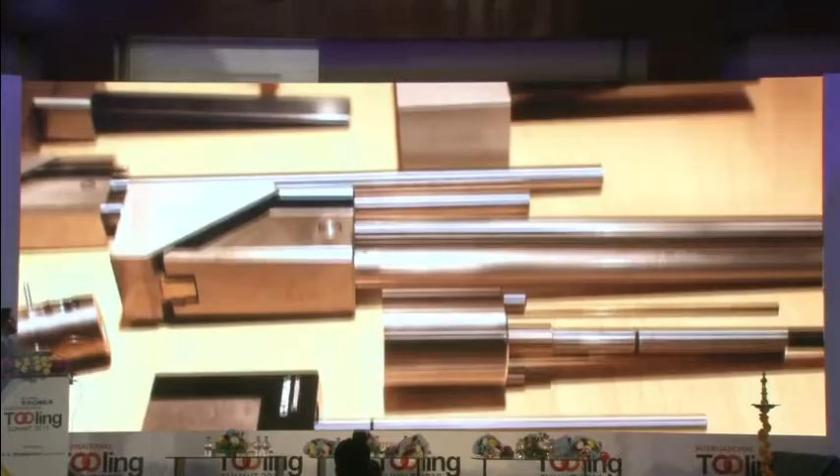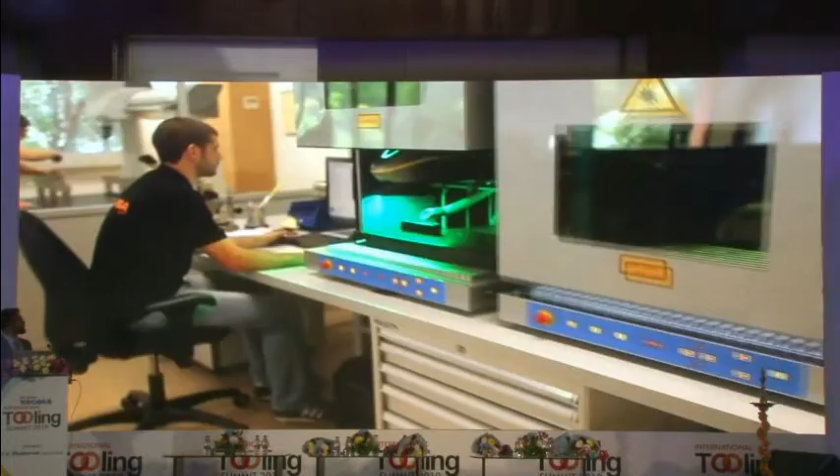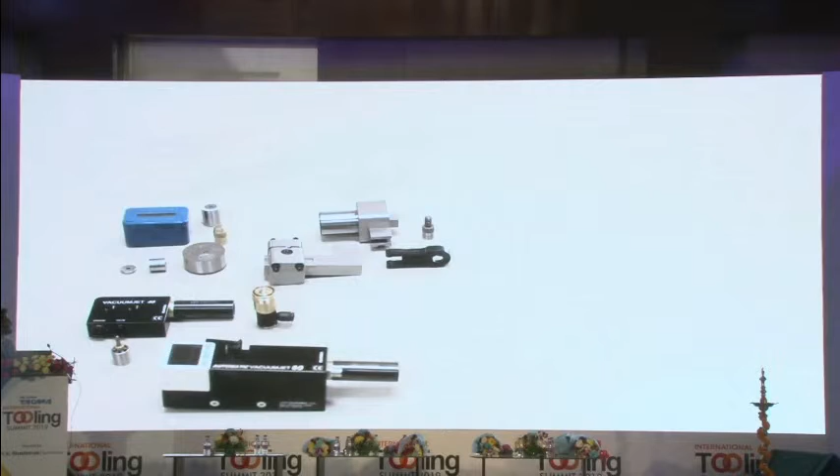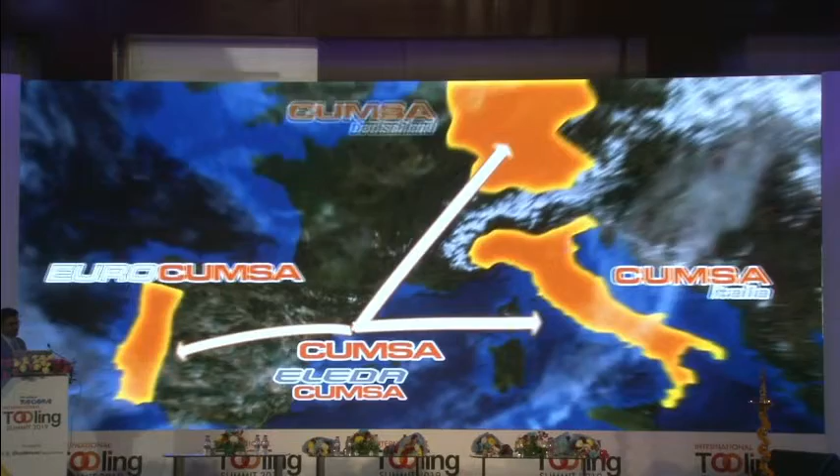CUMSA, founded in 1974, as a small family company dedicated to the design and production of molds. Throughout the early years and our growing experience, we could see that the customer's high-quality requirements could not be met due to technical difficulties typical within this sector. So we began creating our own solutions to these problems, developing parts that drastically improve the performance of our molds. Upon realizing just how much of a revolution our parts were, we discovered our future: innovation. At CUMSA, research and development is the motor of the company, and innovation, our DNA. We design and produce completely interchangeable standard parts for mold makers and molders, which allow reduced mold manufacturing time between 30 to 40%. Simple installation and adjustment within the mold. Fast replacements from the parting line. Minimized production downtimes. Reduced mold sizes. And cheaper production costs. Years of hard work, determination, and precision have made us a leader of standard parts within the molding industry. Our constant growth wouldn't be possible without the direct contact and feedback from our end customers, a goal we achieve through DTM CUMSA, who continue our original idea of the production of molds. Our best guarantee: 40 years of experience, and our branches in Portugal, Italy, Germany, China, and the USA. We were born reinventing, and we continue innovating. CUMSA, we are innovation.

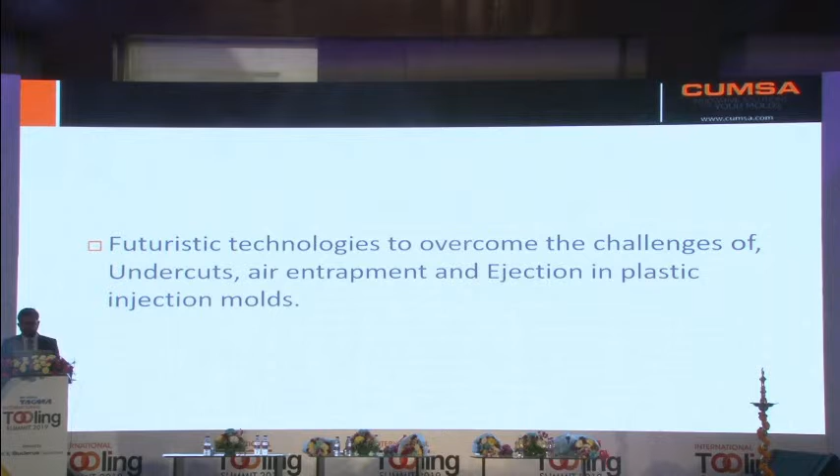Thank you. As rightly said in the video, innovation is in our DNA. So we straight away jump into our topic: futuristic technologies to overcome the challenges of undercuts, air entrapments, and ejections in plastic injection molds. I will start with an example of a simple small size undercut. The conventional way to release the same is by using an angular device, whereas in CUMSA we use a sprung core, which is very compact in design.

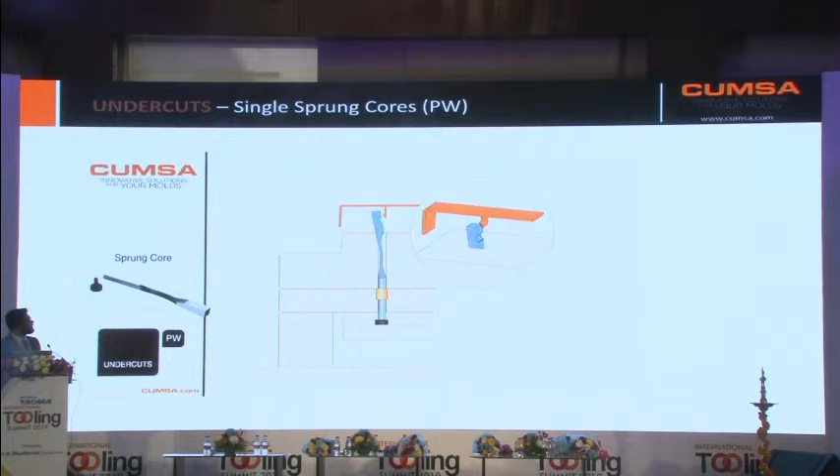Here's a small animation showing the sprung core working. All the machining is 90 degrees from the parting line. That's the biggest advantage. Here's an image showing an undercut on the two sides, which is released by two face-to-face sprung cores. And as we all know, since the 1990s, sprung cores are widely used.

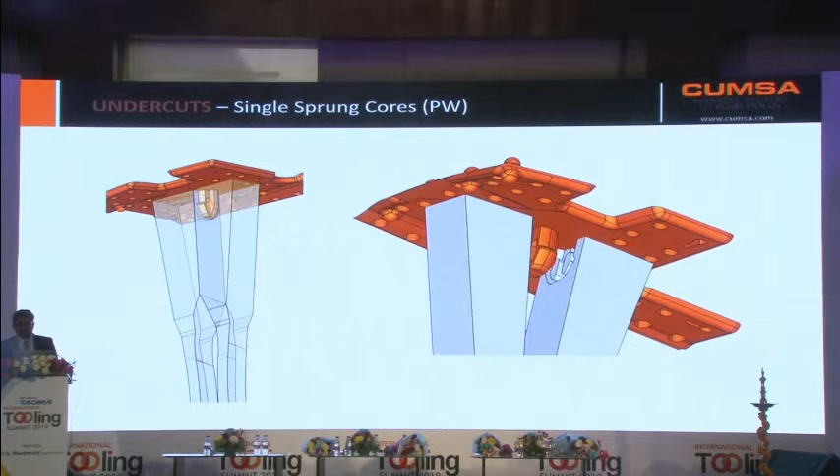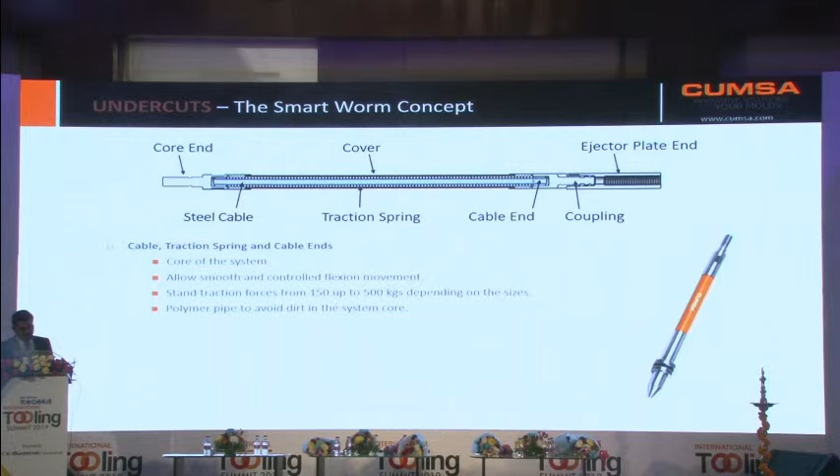So as a part of innovation, we have in place of the sprung core the new smart worm pin concept, which is structured using a traction spring and steel cable, thereby improving flexibility, strength, and longevity. Here's an animation showing the working of a smart worm pin lifter. The ejection strokes start from 60 mm to 120 mm, demolding undercuts up to 13 mm.

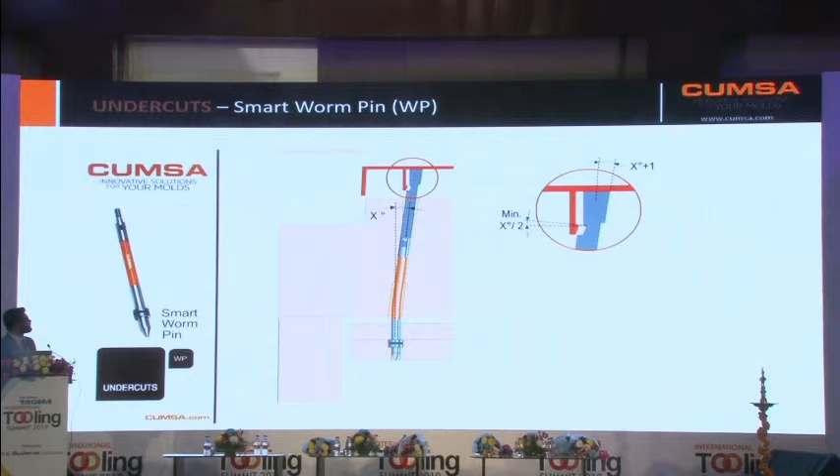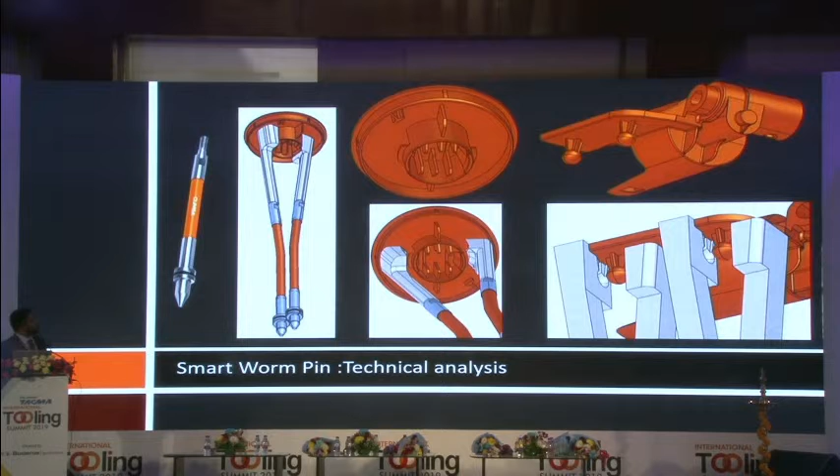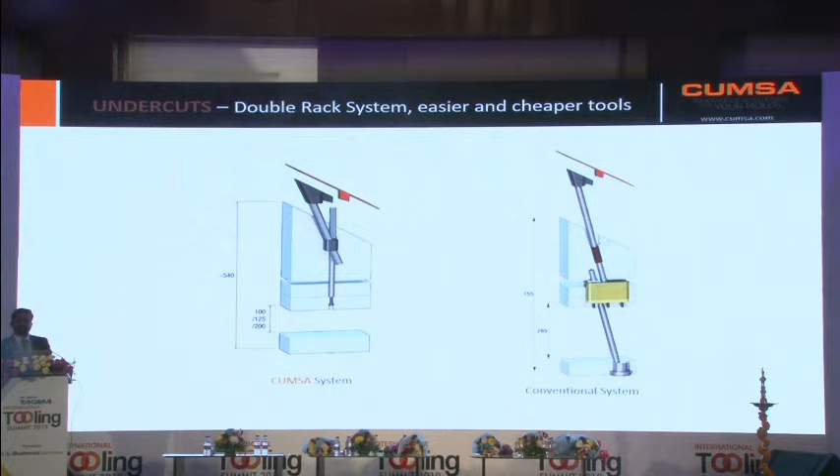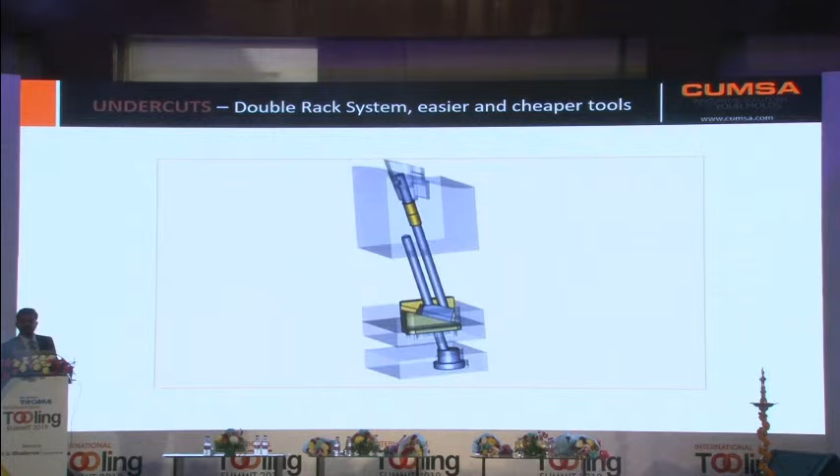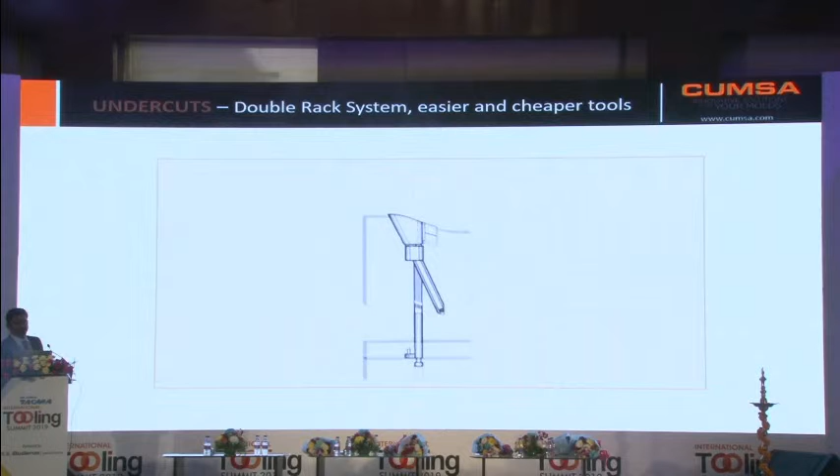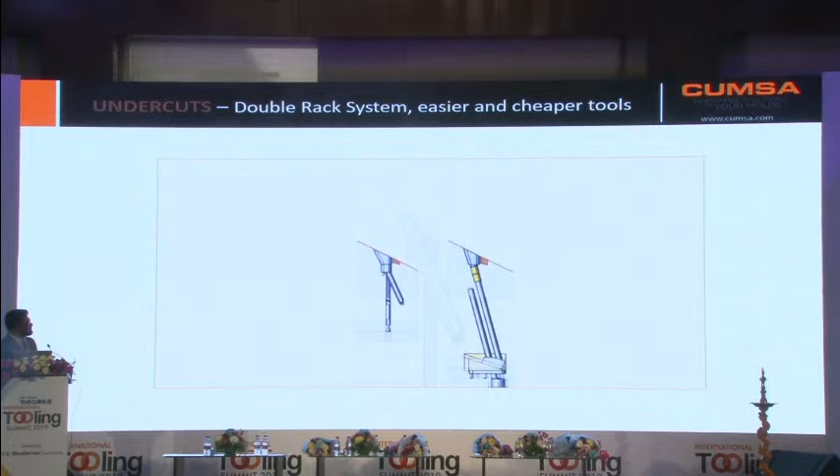Here I would like to take you through an animation showing the difference between the traditional solutions and the new double rack system. This is the typical one, and that's the innovation from CUMSA, the new double rack. This system eliminates the need for highly precise angular machining. That's where we can see the difference. The conventional system has much longer ejection strokes because of its angular function.

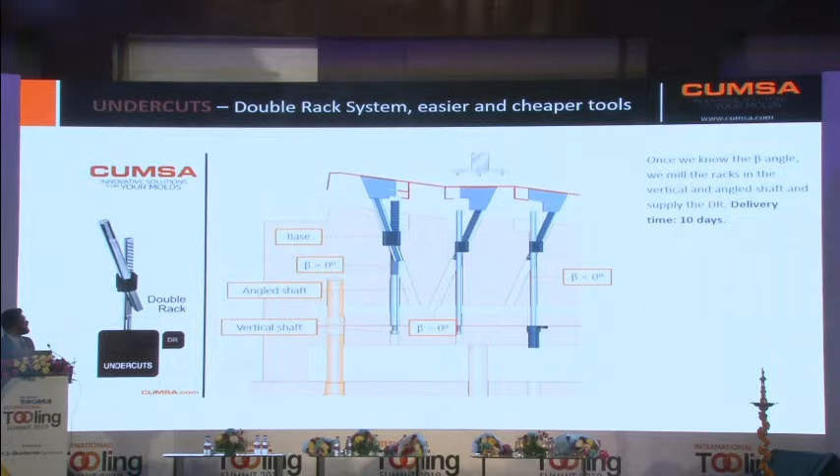And with the CUMSA double rack, we can demold undercuts with a draft of -55 degrees to +35 degrees with a maximum ejection stroke of 125 mm. Now that's a big saving. Here's an image showing the construction of a double rack lifter assembled into a tool with a plastic component having 3 different draft angles, one negative, one positive, and another flat. So all 3 different undercuts are released with the same ejection stroke.

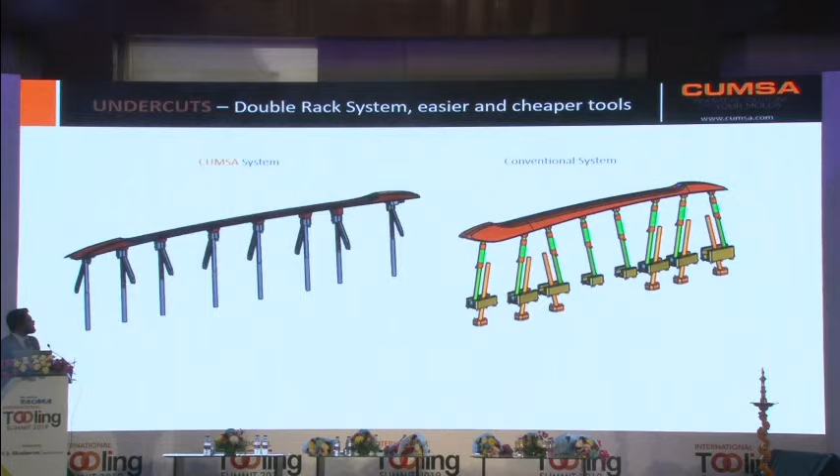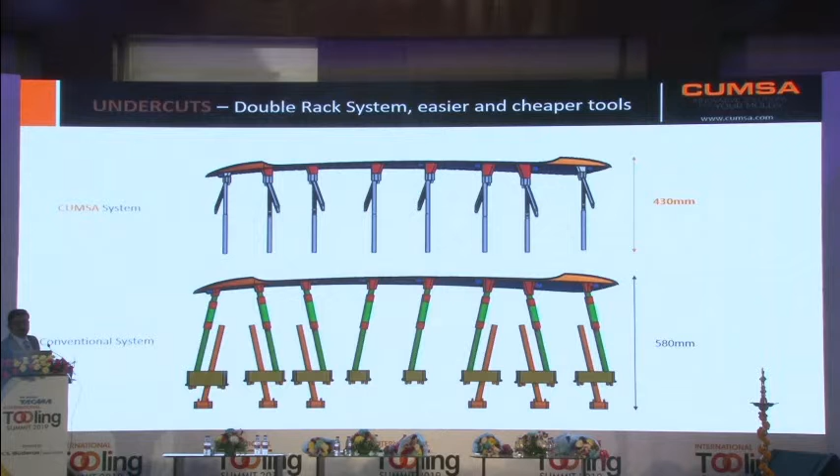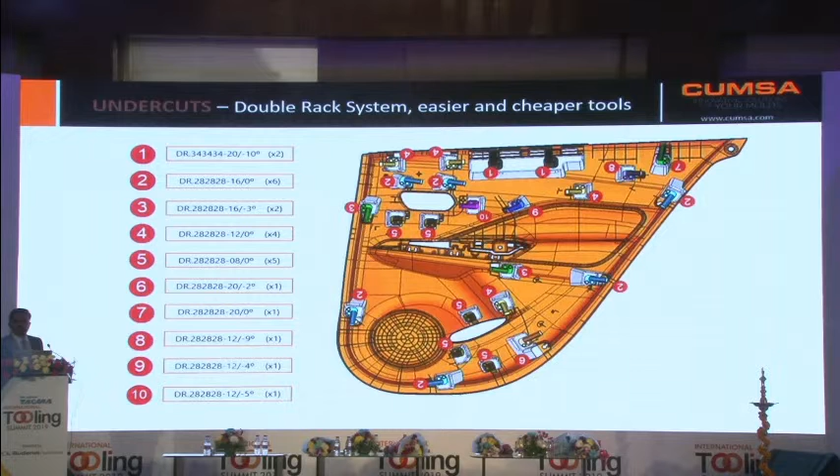That's a profitability study between a conventional system and a CUMSA system with the same part. This is where we see the advantage, that the mold height is reduced by almost 150 mm using the CUMSA system. That's the image of the part having the dog housings. This is one of the most complicated case studies, a door trim having different dog housing undercuts from 0 degrees to -10 degrees.

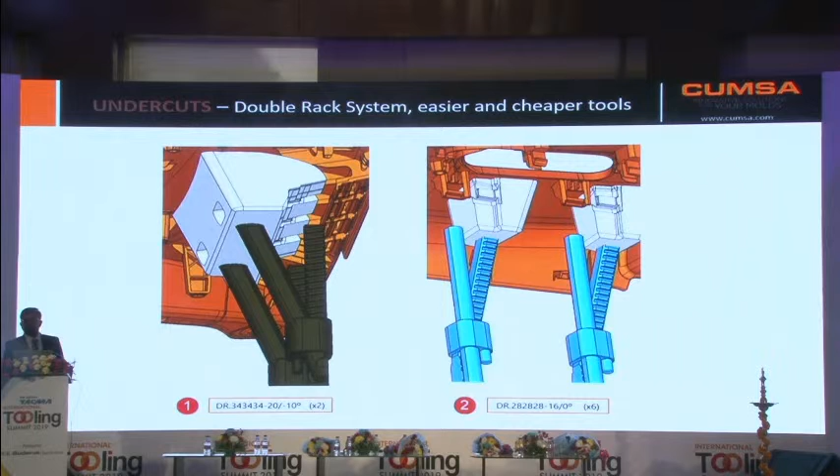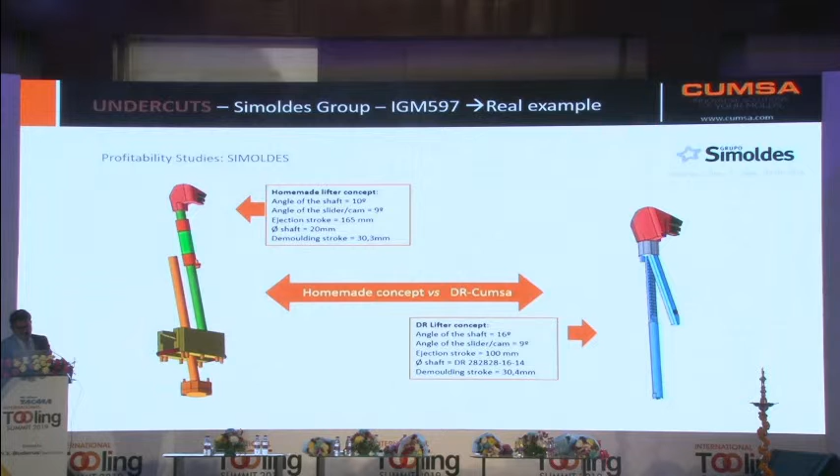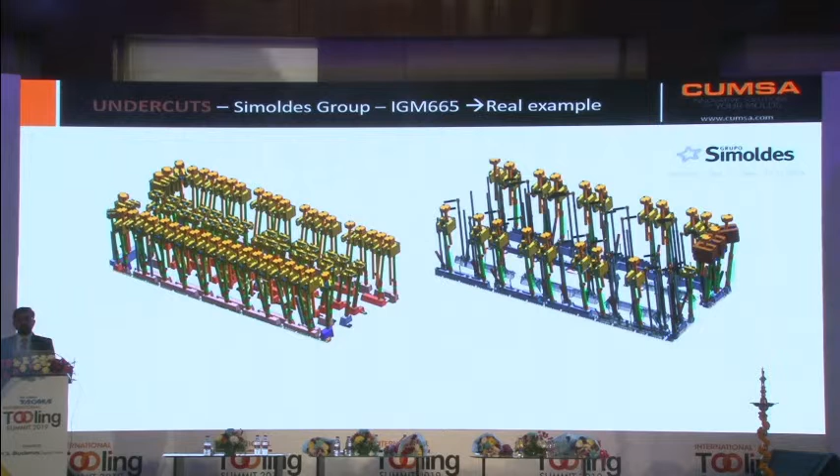Here's a very interesting profitability study made by Simoldes between a conventional lifter and the new double rack system. We can see the typical construction of the angular lifters on the left, and on the right we see the CUMSA systems installed to the part. On the right, we are getting bigger space to accommodate the ejector pins at the right places and also to achieve symmetry of the cooling.

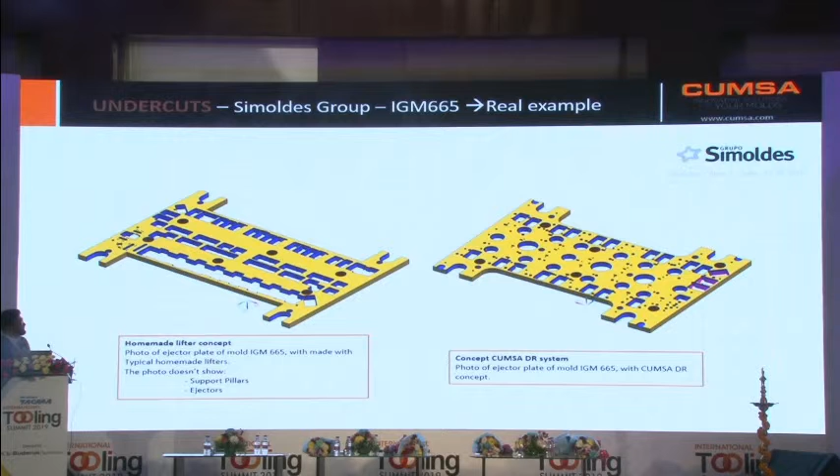This is the difference of machining between the CUMSA system on the right, and on the left we have the conventional system. This is the ejector plate. So overall, using the CUMSA system over the conventional lifter, Simoldes saved around 6,000 euros.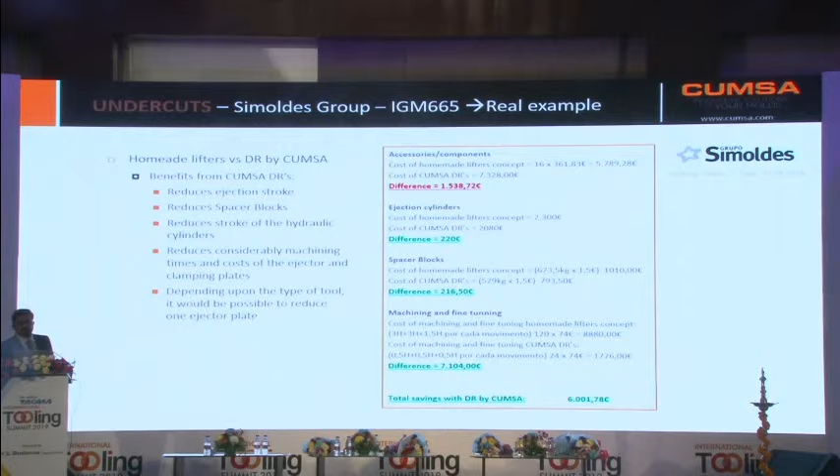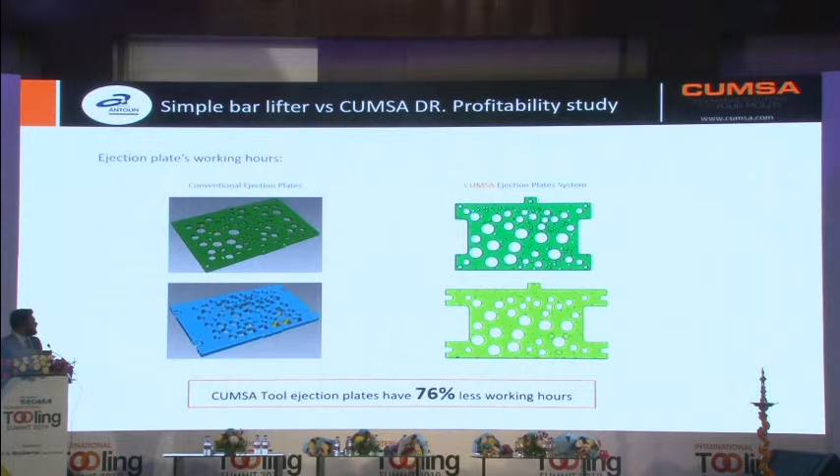Here we have another case study between Grupo Antolin. Grupo Antolin saved 76% of working hours with the CUMSA system and had 44% less ejection stroke. Now that I would say is a big saving because you're reducing the tool height, and that in turn reduces the cost of the steel.

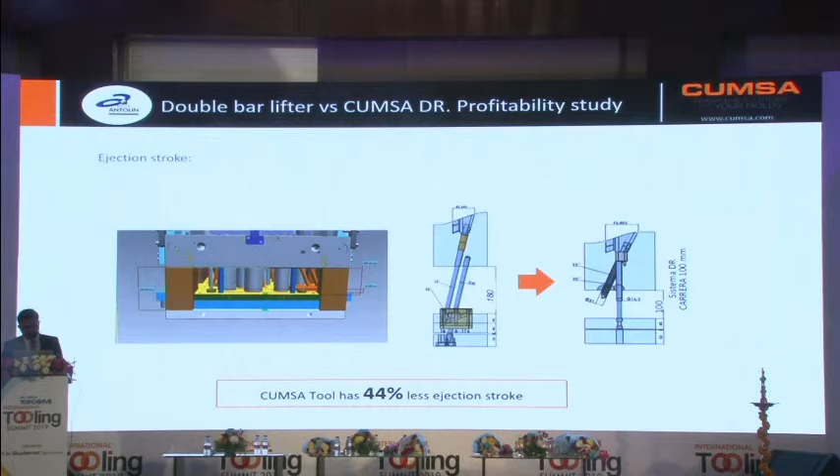The image on the left shows how complicated it was to release the undercut using the sliders, whereas the image on the right shows double rack systems installed vertically, enabling a reduction in tool size. Also, what we can observe is that the cooling is taken right to the insert, enabling cooling of the part where it is required to be cooled.

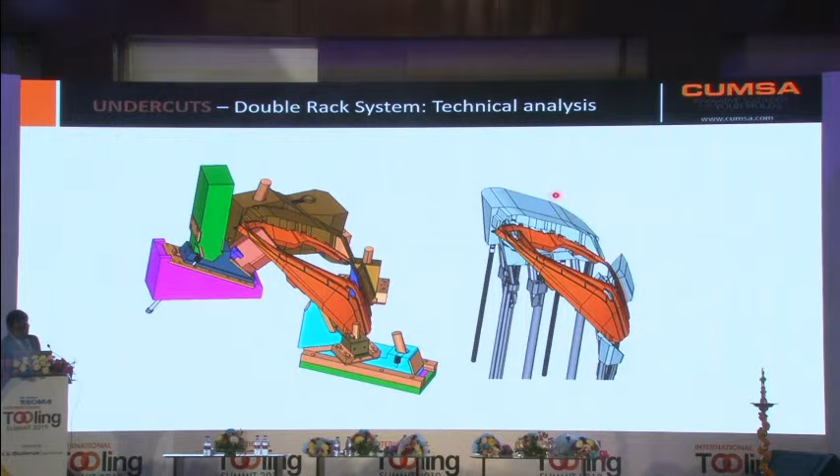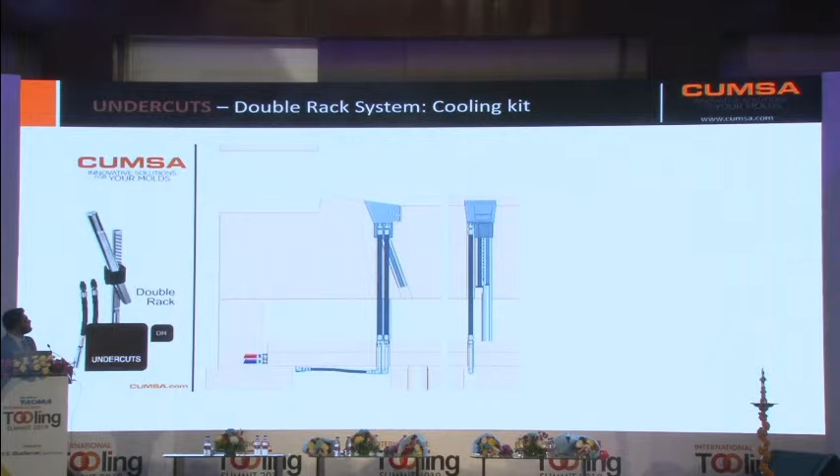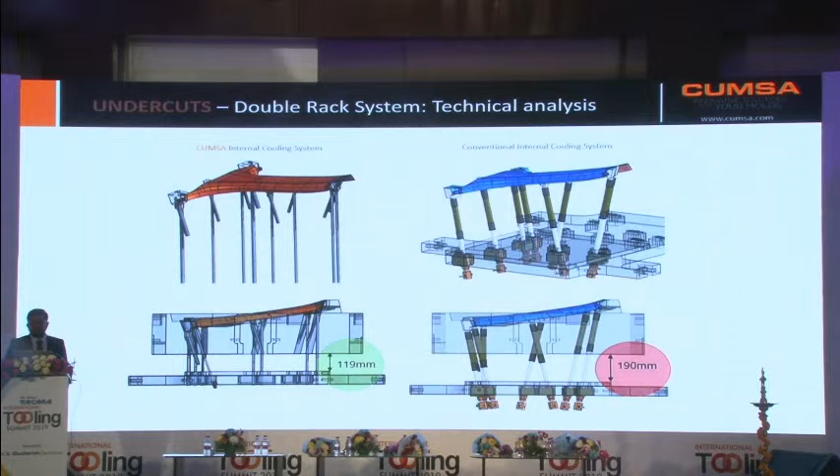Now that's an animation showing the double rack system with cooling system. That's another case where we have taken the cooling right to the insert. Here's a case study between a conventional cooling system and a CUMSA internal cooling system. With the CUMSA internal cooling system, the customer was able to achieve 70 mm less ejection stroke.

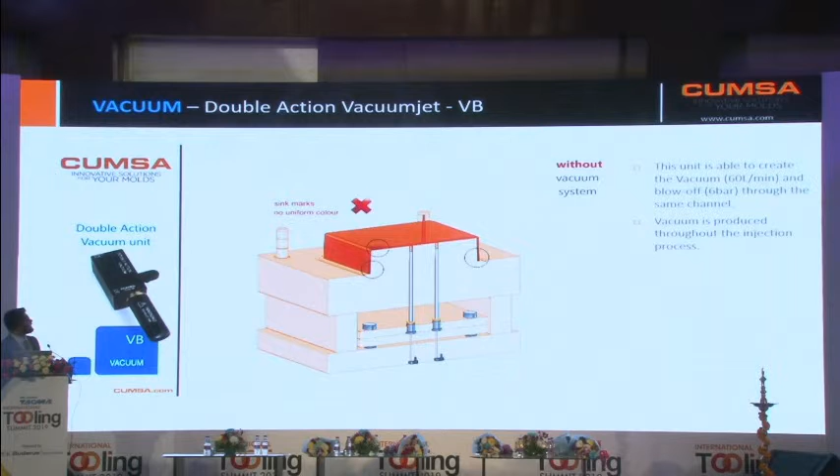Now, one of the biggest challenges that we all face is air entrapment in the mold. I would like to take you through a brief animation which speaks for itself. That's the air getting trapped in the mold. The air gets cornered at one end, at the last fill area, and we observe burn marks or non-uniform homogenization.

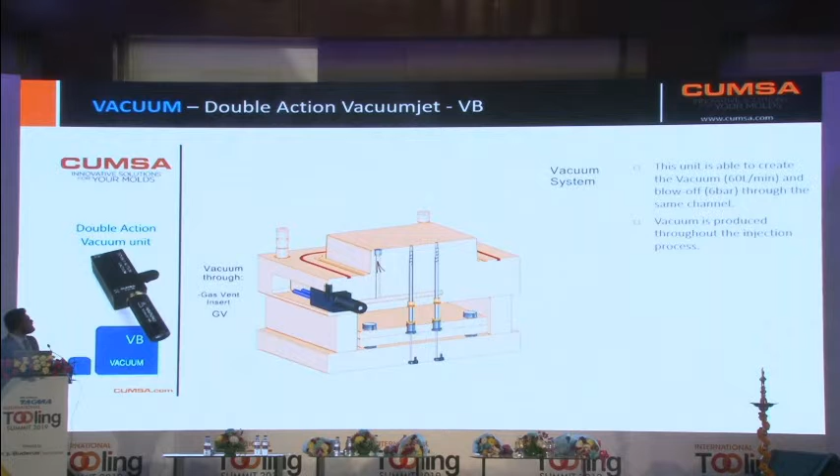Now, while installing a CUMSA system, we drill the vacuum channels using the gas vent inserts, which perform both functions: one is to exhale the air from the cavity, and second, to blow off the gas. That's the installation of the vacuum jet system. And the complete tool is sealed to achieve a hermetic tool.

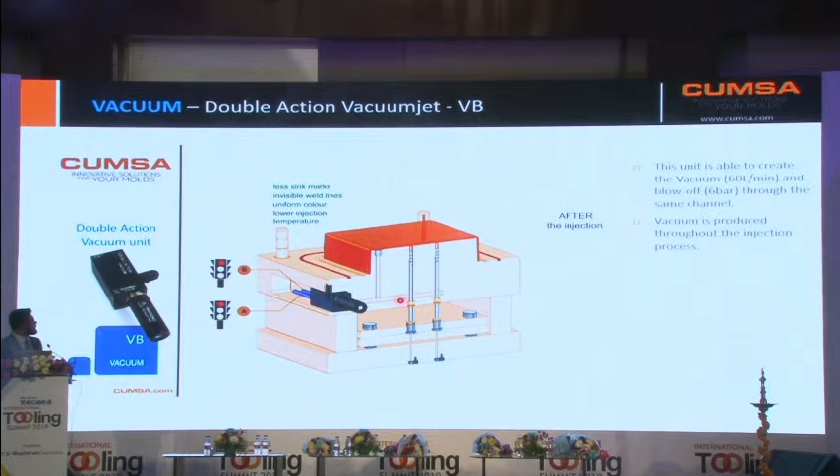So what happens? When the mold closes, the signal is given through the solenoid valve to the vacuum jet system, and before injection, all the air is exhaled from the cavity. That's how the air is being taken out. And the same goes on even during the injection, because more often than not, engineering plastics tend to produce gases during injection. And after the injection process is completed, the blowing process starts, enabling easy ejection of the part.

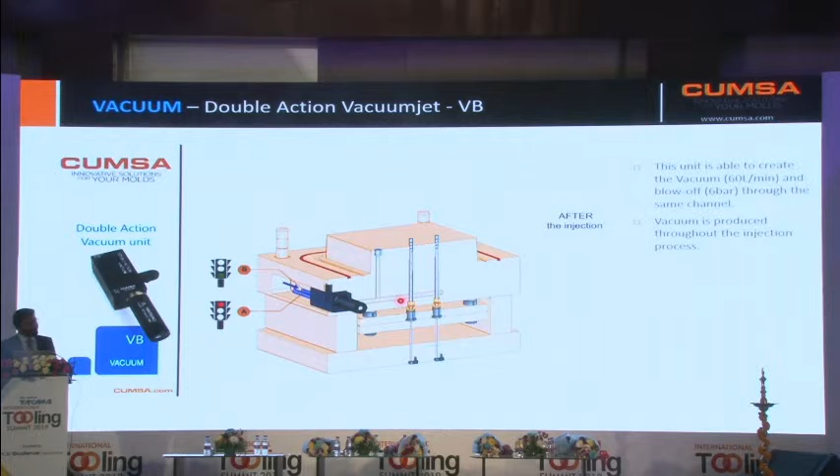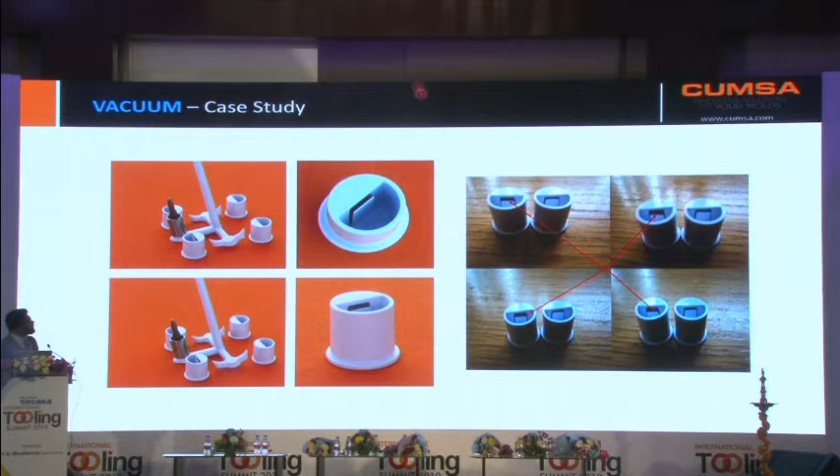Here's a case study showing an image with and without the vacuum jet system. In the image on the left, we can see a short fill area. But after installing the vacuum jet system onto a runner, the customer was able to achieve a 100% filled part.

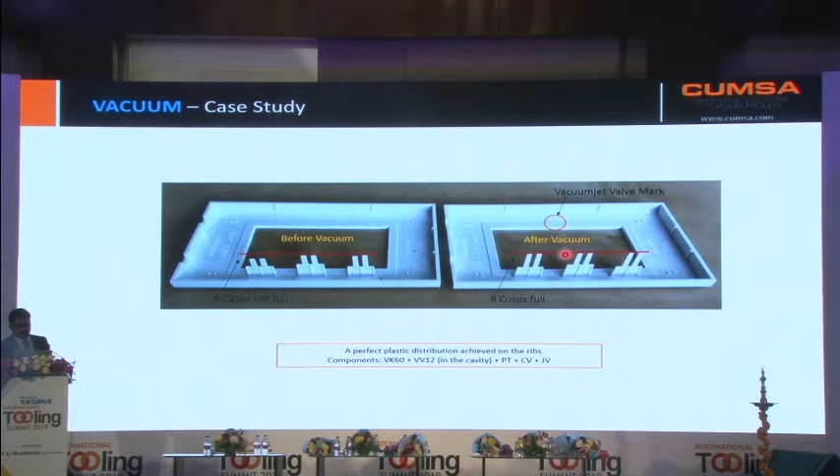That's another case study showing unfilled ribs, because obviously the air gets trapped at the end. But here we have placed one vacuum jet valve at one corner of the cavity, and it exhales all the air from the cavity, which enables the component to fill completely. Hence, we can see all the ribs are evenly filled.

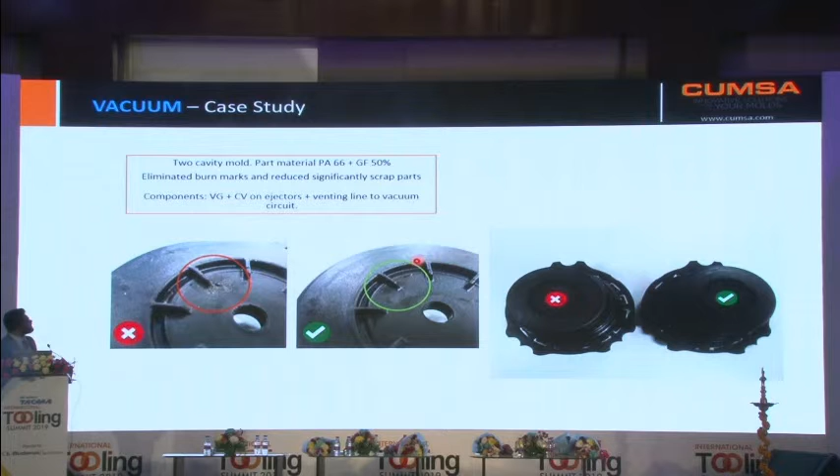Here's another case study where the raw material is polyamide with 50% glass fill. What we can see here is the burn mark or the short fill. But after installing the vacuum jet system, we are able to achieve a 100% good quality part. It is also widely used in transparent components to have clear aesthetics.

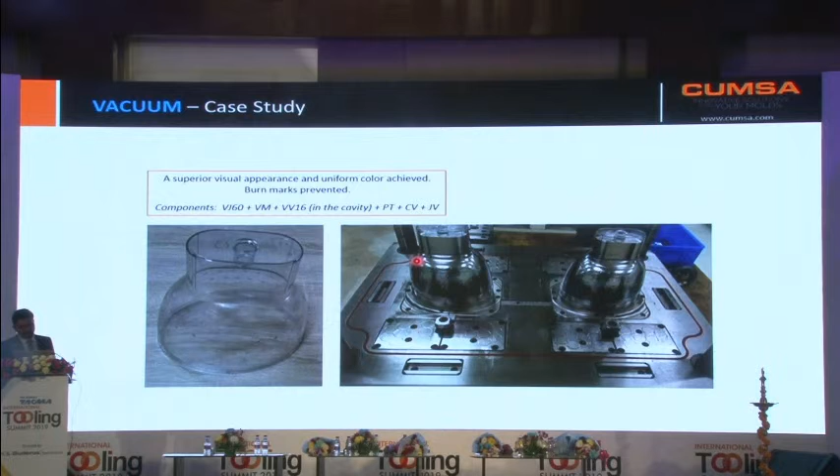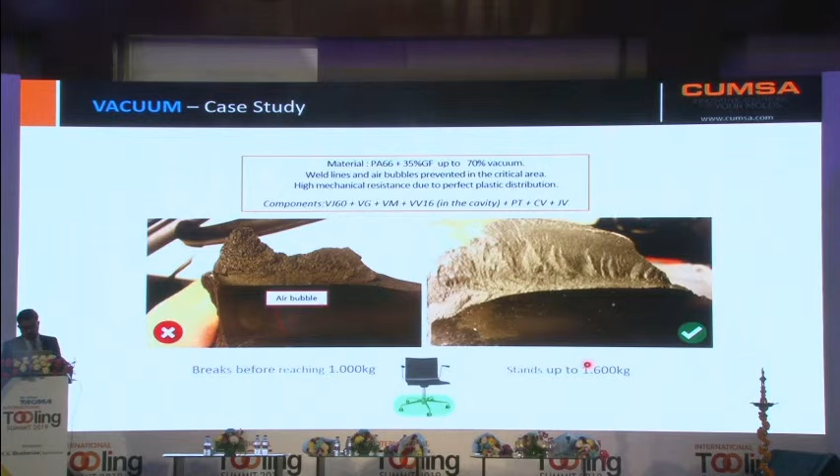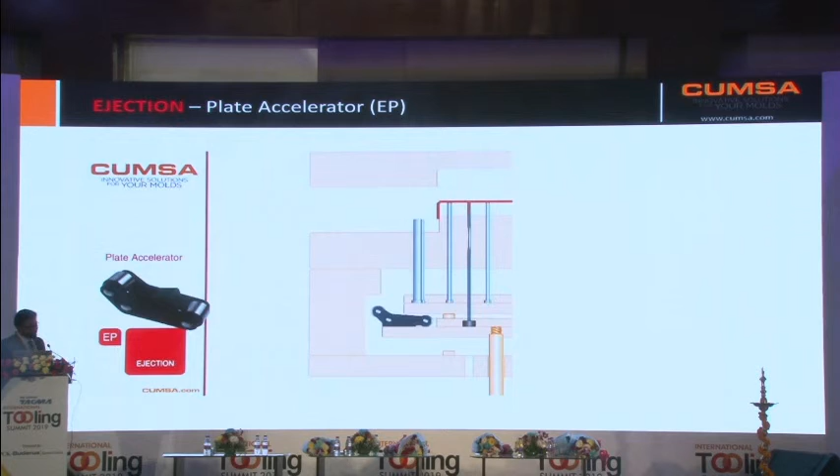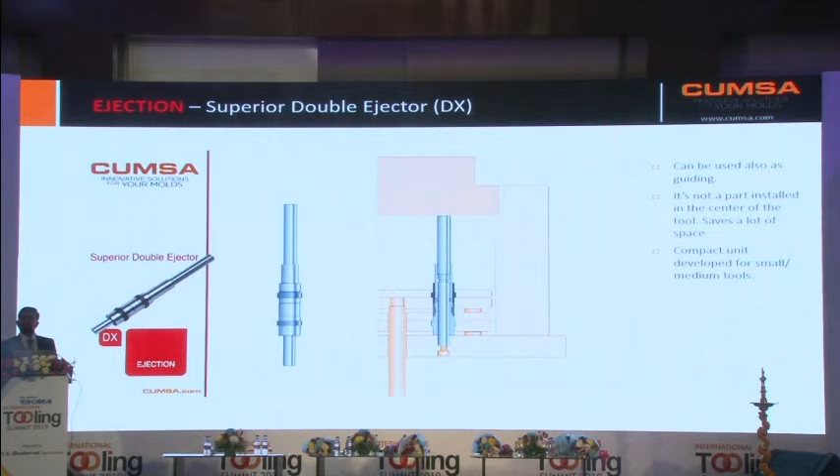Now, we move to the last part of our presentation, that is ejection. This is the simplest and most common mechanism in our product portfolio, for two-stage ejection. The installation is very easy. That's the double ejector. This unit divides the ejection travel into two predefined strokes. At the first stage, we release the undercut, and at the second stage, the part can be ejected. This unit can be placed diagonally in the ejector plate and also acts as a guide pillar.